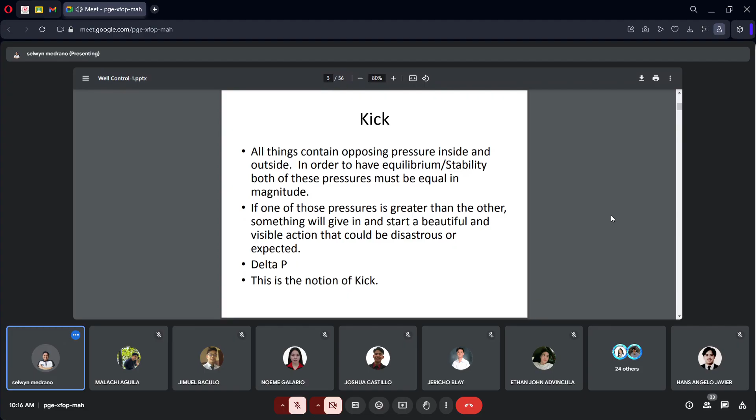This blowout is visible at the surface, meaning this is the common blowout that you're very much familiar with already.

Blowout is not only limited to this type, but there's also another type called underground blowout, which is more disastrous, more detrimental compared to this one, since that kind of blowout is unseen, and it can break or destroy the formation or the reservoir.

For example, if a blowout happens, the accumulation of pressure occurs near the trap. So technically, after a blowout happens, the trap will be destroyed, or the integrity of our trapping mechanism won't be enough to hold the hydrocarbon.

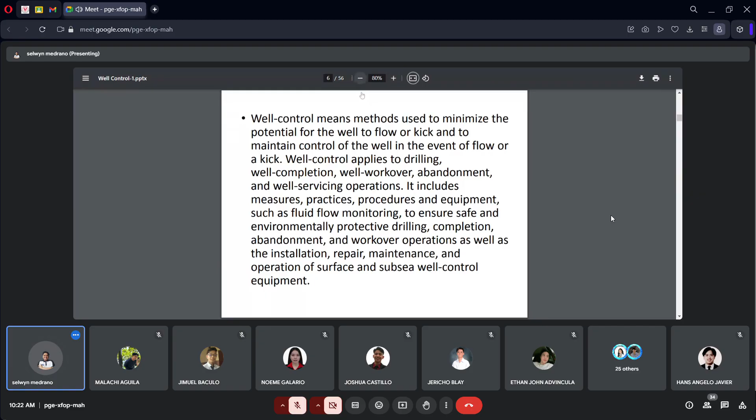Formation fluid influx, which is the other terminology for a kick, may result from one of the following reasons. These are the possible reasons why a kick occurs.

First is abnormally high formation pressure. This scenario could happen if the reservoir or prospect we encounter is highly pressurized, which is very realistic when the formation is a gas reservoir, since gas is typically pressurized compared to oil reservoirs. High pressure is common in gas reservoirs, and this also applies to HPHT, or high pressure, high temperature wells. This first statement supports the examples I mentioned.

We also have lost circulation. The concept of lost circulation is the escape or loss of our drilling fluid during the drilling operation. It goes into the reservoir or the formation. Another reason for this is that the mud weight, or drilling fluid density, is too low.

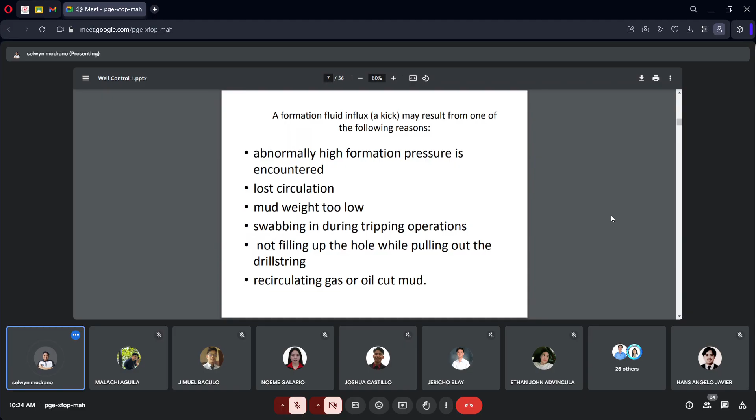Pa-heart track na lang if visible. Okay, thank you. Huwag natin doon sa slide mo.

Kapag masyadong mababa ang ating density or mud weight, technically ang mud weight ay ang density ng ating mud. Remember sa fluid mechanics, ang formula for pressure is P is equal to rho (density) multiplied by G (gravity) times H. So ang pressure natin ay determined by this value, at alam natin na itong G or gravity ay constant.

Itong H, kung siya ay para sa reservoir, ay yung thickness or height ng reservoir. Batay sa mathematical equation, ang pressure at density ay directly proportional. Ibig sabihin, once the density is high, ang resulting pressure ay magiging high din, given na ang G and H ay constants.

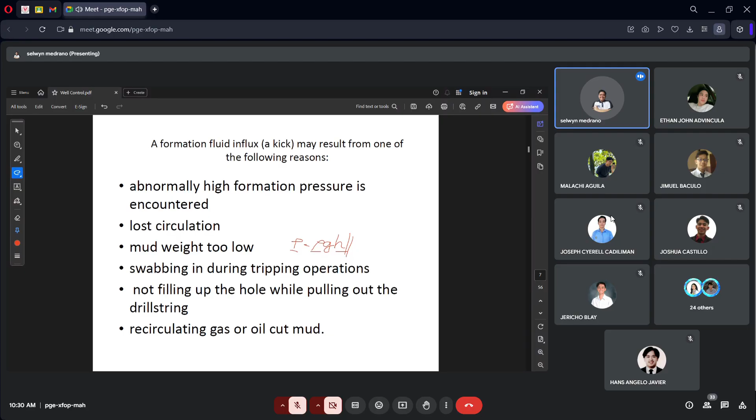So we have what we call primary and secondary control. Let's start with secondary control, which we all know is the BOP, or blowout preventer. This is classified as secondary control only. The primary control is based on overbalance pressure.

When we say overbalance pressure, it means the hydrostatic pressure exerted by our drilling fluid in the wellbore must be greater or higher in value compared to the formation pressure. The opposite is when the formation pressure is higher, which we call underbalance. This underbalance drilling is a kind of drilling used in the industry.

I don't think it's included in our scope, but you can read more on underbalanced drilling. The concept is that in underbalanced drilling, the formation pressure is higher than the borehole pressure.

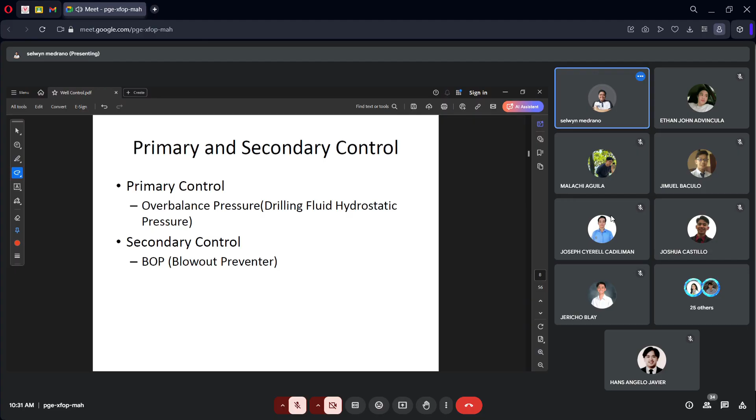So next, these are the surface equipment associated with our secondary control. This is our BOP, from here to here.

Then this serves as the Christmas tree, since it's more of valves and spools, I mean valves, spools and lines. We also have what we call the choke line and the kill line.

The kill line and choke line each have their own definitions. Both are high pressure lines or pipes, but our kill line's direction is from our rig pumps towards the BOP stack.

On the other hand, the flow line itself carries our oil, the combination of oil, water, and gas, which is the petroleum, connecting our wellhead to the manifolds, then to the production facilities.

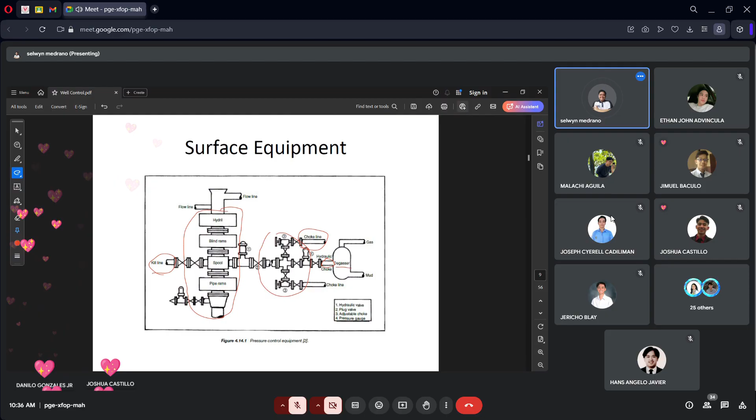Next, we have the four warning signs of kick. We have drilling break, decrease in pump pressure, increase in pit level, and gas cut mud. We'll discuss these one by one.

For the drilling break, this is the sudden increase in our drilling rate or penetration rate, what we call ROP or rate of penetration. So why does it suddenly increase? It may be due to the decrease in difference between the borehole pressure and the formation pressure.

So nabawasan yung difference doon sa borehole and formation pressure. Isa pong reason is may scenario na nakaka-encounter tayo ng soft formation. Technically, soft formation and permeable zone or permeable formation, so kapag na-encounter natin yung mga formation na ganun, mas bibilis yung ROP, lalo na kung design siya for medium formation sa hardness. Halimbawa design siya doon sa hindi matigas pero hindi din malambot na formation. Once it encounters this soft formation, mas mabibilis yung ROP niya or expected na bibilis.

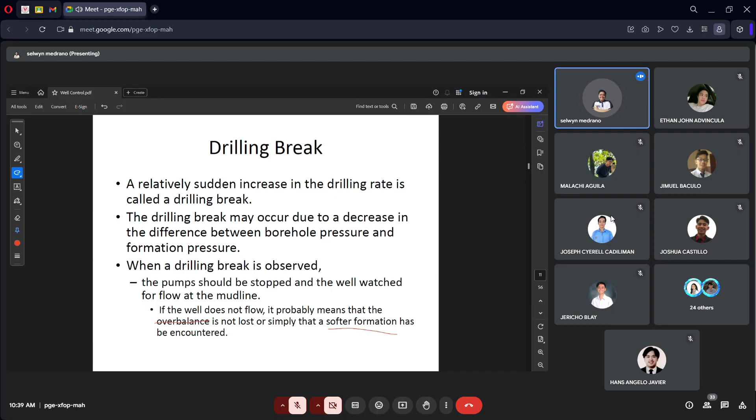Next is the decrease in pump pressure. This happens when less dense formation fluids, specifically yung mga gas, enters the borehole and the hydrostatic head in the annulus decreases. Somehow connected ito doon sa gas cut mud, kasi yung less dense formation fluid ay pertaining doon sa ating gas, and this gas might be in cut with our oil. Humahalo siya dun sa ating oil, and this will lead to a decrease sa density ng ating drilling fluid or drilling mud, at which this decrease in density will result to decrease in the hydrostatic head, since this hydrostatic head is the hydrostatic pressure na tinatawag natin.

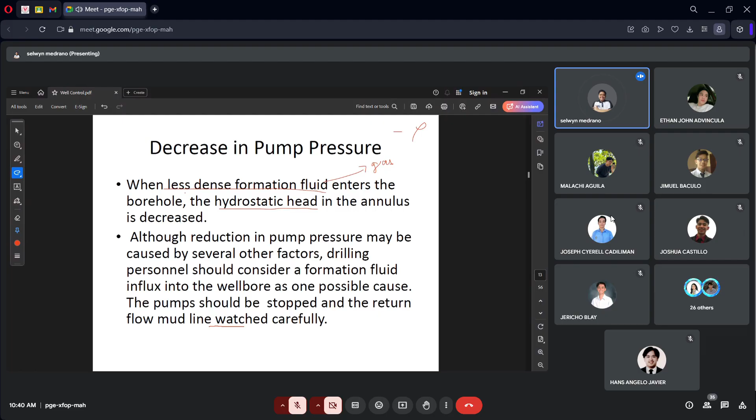Although reduction in pump pressure may be caused by several factors, drilling personnel should consider a formation fluid influx into the wellbore as one possible cause, and the pumps should be stopped and return flow at the mud line must be watched or monitored carefully. Ito yung sinasabi nung rho GH, kasi yung kanina pang sinasabi, yung formula ng pressure is equal to rho GH, or density times gravity times head.

Next, you have here the increased pit level. I think this is very much applicable kapag po yung ating kick. Di ba sabi ko na sa inyo, or kung hindi ko pa nasabi, meron po tayong part ng computation.

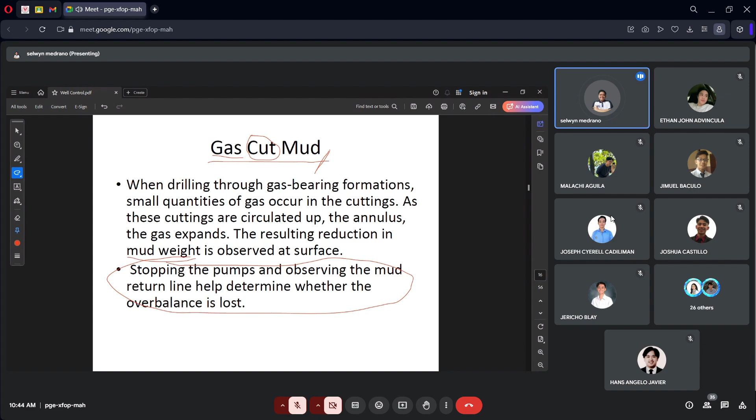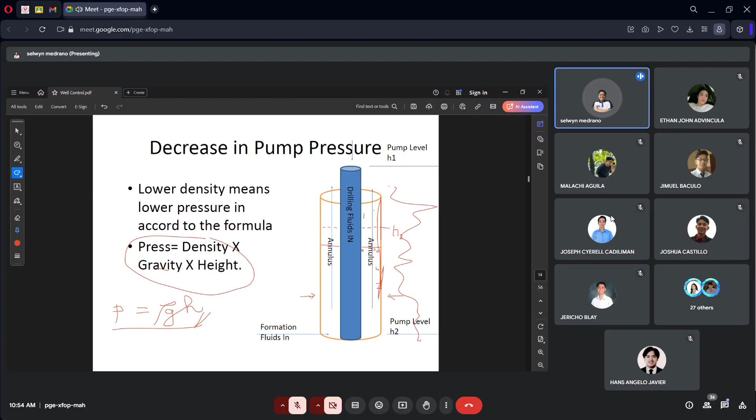So going back dito sa ating discussion, yun yung pinakaiba ng shut-in drill pipe pressure at shut-in casing pressure.

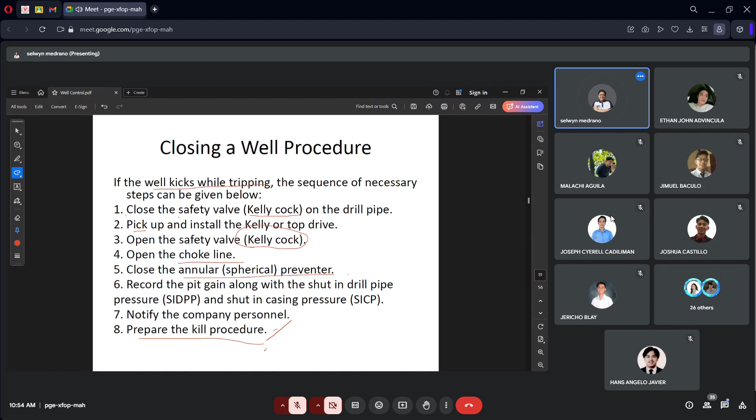So next, before you proceed to the killing procedure, i-notify po ulit natin yung ating company personnel, then prepare yung kill procedure or the killing operation. So ito po yung sample ng kick sheet na pinipilapan po ng ating mga drilling engineer during the occurrence of this kick.

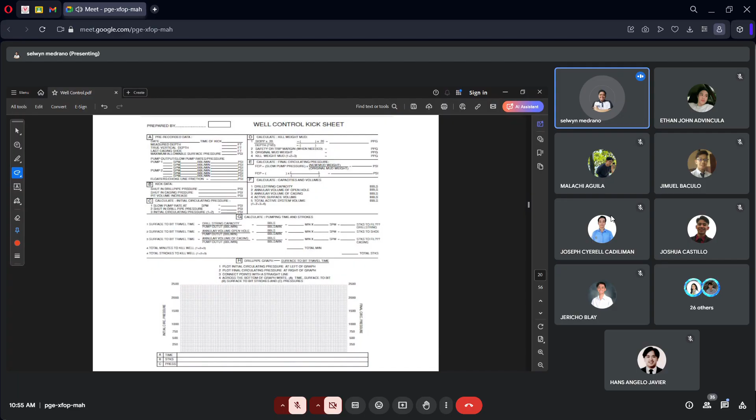Meron siyang parang well control measures, safety measures during the kick, kasi expected po lagi na magkakaroon ng kick, hindi po common siya nangyayari. So next, ito yung sample, I think meron din naman siya dyan.

Upon shutting in the well, so the pressure builds up, na-discuss ko na. Yung rate in build up and time required for stabilization ay depende sa ating formation fluid type. So ano nga po yung formation fluid types?

Yung 5, ang isa ay black oil. Ano pa yung apat na tira? Pero yun ay black oil, condensate, yung mga model - black oil model, condensate model, volatile oil. Tanda yun, yung tatlo: condensate, volatile, black oil, gas.

Sir, pagkakatanda ko po ay black oil, volatile, retrograde po ata yung isa. Yeah, retrograde condensate. Condensate po, tapos gas at dry gas po.

Paulitin nung apat, ano yung apat? Wet gas po, dry gas. So yun: black oil, volatile oil, retrograde condensate, tapos wet gas at dry gas. Yun yung different formation fluid types. Then we have yung formation properties.

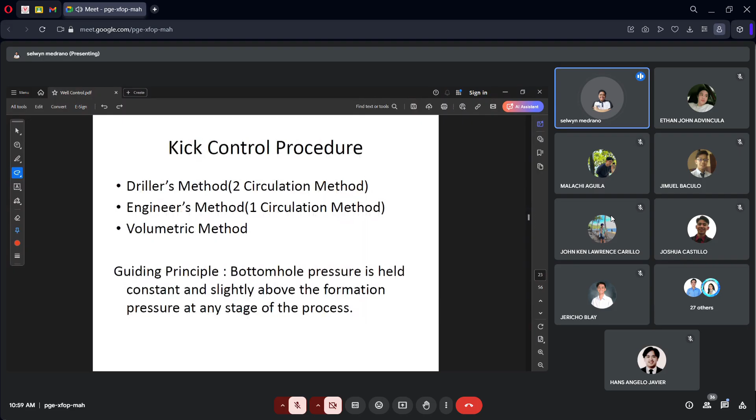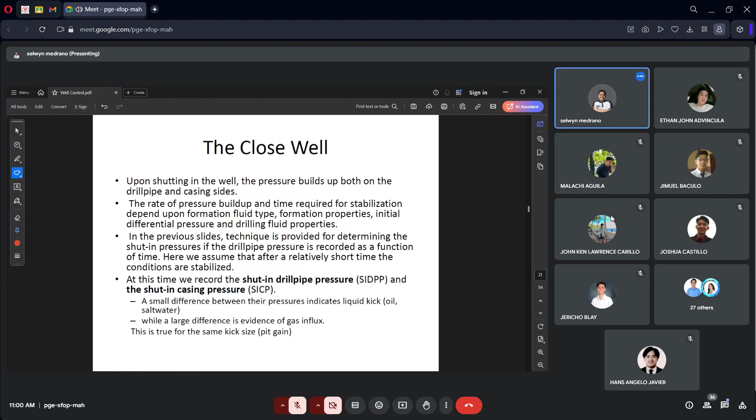If there's a large difference between SIDPP and SICP, the kick is gas. If there's a low difference between SICP and SIDPP, the kick is liquid. Understood?